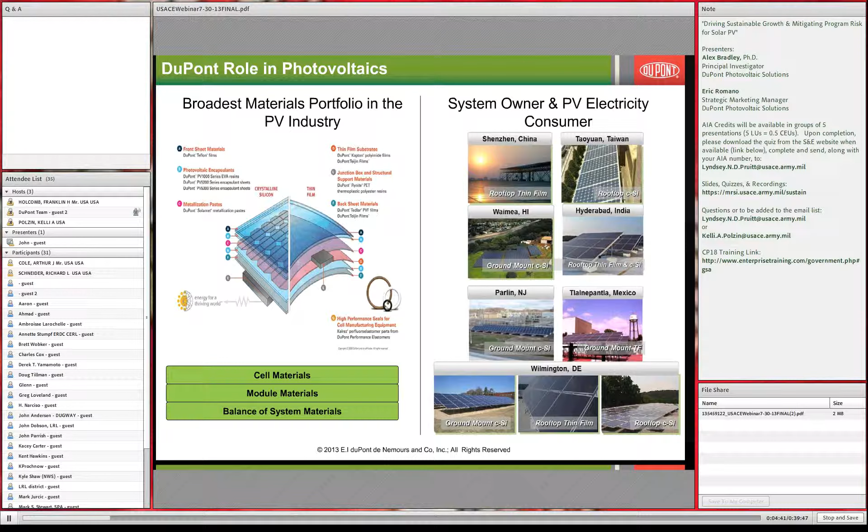On the right-hand side, when we look at some of our systems at DuPont manufacturing sites around the globe, it's important to recognize, just like I'm sure for many of your systems, there are many site-specific requirements. In some cases we use photovoltaics to maintain and achieve LEED Green building certifications. In some cases we have systems for technical analysis and training. And then other sites we use for truly distributed generation of electricity where the cost of electricity is very high, such as in Hawaii.

So this is Eric again. Let's start to look at the sort of morphology of a PV project, if you will. And first we'll look at kind of the objectives one is trying to achieve, and then we'll start looking at these over the frame of time. Achieving all the objectives of someone earning money, getting the power out of a system over a long period of time is very non-trivial. And the energy production and the financial performance when one is doing a PPA are not always aligned.

So if we look at the financial performance side first, there's a lot of developer focus on incentives, taking the cash out through our interesting tax system in the United States. The off-taker payments, there's often performance insurance that backs up a warranty, and clearly potential warranty claims if there are in fact issues. What one has to remember is one does not get the electrons back, right?

So if there are system issues, if the degradation is higher than predicted, and one wants a certain output from a system, it's challenging enough to get the financial performance one wants and actually achieve a warranty claim, for example, and we'll touch on that. But actually, you just don't get the electrons back. So folks that want to manage against a particular energy output need to be more careful in how they structure their projects and how they deal with the industry in that regard.

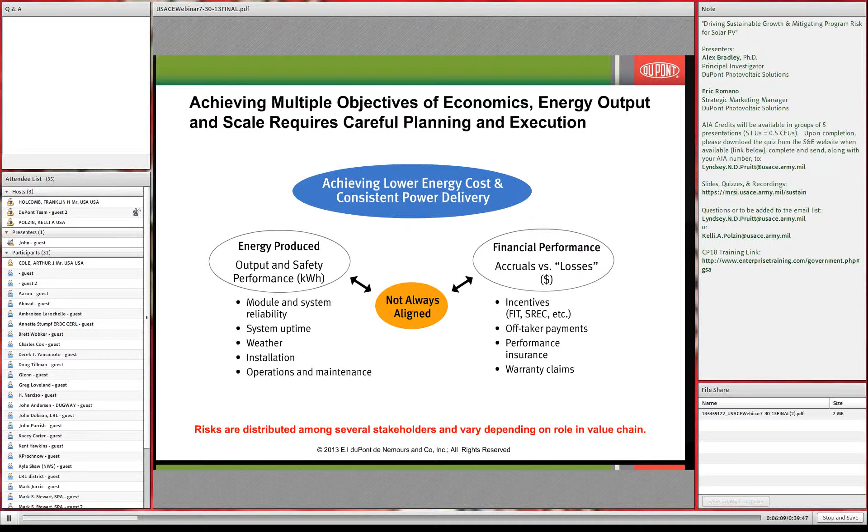Two examples we frame that people start with the same objectives and have very different outcomes. The example on the top is 24 schools in San Diego, California, with the objective of going with solar to reduce energy price and also get off the grid and have their own energy security. After 6 years, all 24 schools had the solar removed because of a defect that led to a safety issue.

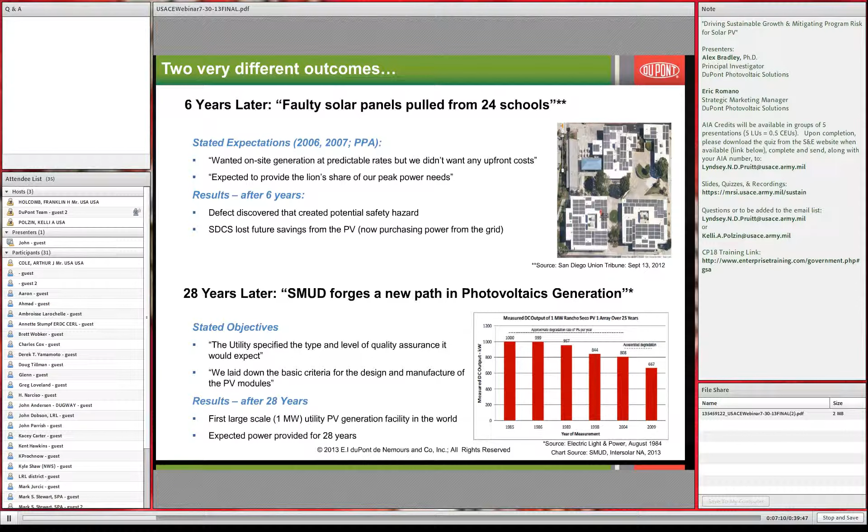The same objective was held by the Sacramento Municipal Utility District in Northern California when they stated they wanted to do the same thing, actually do maybe a little more technical experimentation. It was the first 1 megawatt site in the world. They, however, took an extra step and specified the level of quality and the technology they were going to use. Those panels worked successfully for 28 plus years. We have many of them here in Wilmington. We're collaborating with SMUD on analyzing those panels. So the objectives were the same, the behaviors were different, and the outcomes were very different.

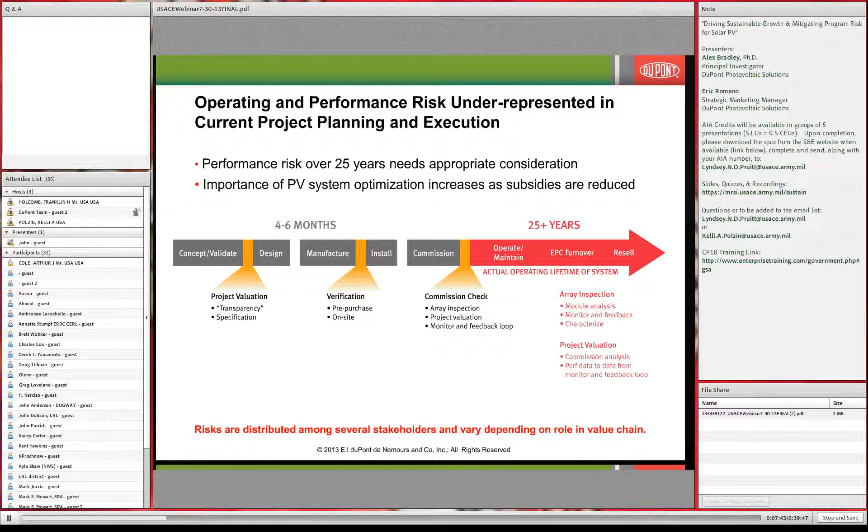If we look now across time in the PV, and we spend a lot of time up and down the value chain trying to understand this and understand performance risk, we find the industry spends a lot of its effort in the first 4 to 6 months of designing and installing the system and ensuring systems get financed. There's a lot of focus on off-taker credit and land worthiness and interconnection, all important issues. Very little focus on what's going to happen for 25 years when the system is performing.

And remember that about 70% or so of all developers are that. They're pure play developers. Projects are likely to be resold, et cetera. So thinking the developer is going to somehow manage performance risk for 25 years is a little bit of a chimera. In fact, Nellis Air Force Base project's been sold twice, and I think it's about 7 years old.

On the next slide, you can see some of the challenges and risks that solar modules will face in the service environment. There are multivariate stresses that operate on a solar module throughout its 25-year lifetime. The industry in some ways has done themselves a disservice in saying that solar has no moving parts. It has moving parts, those laminated structures, they just move very slowly over time. That's coefficient of thermal expansion. And recognizing that many of these stresses will be operating simultaneously on the module.

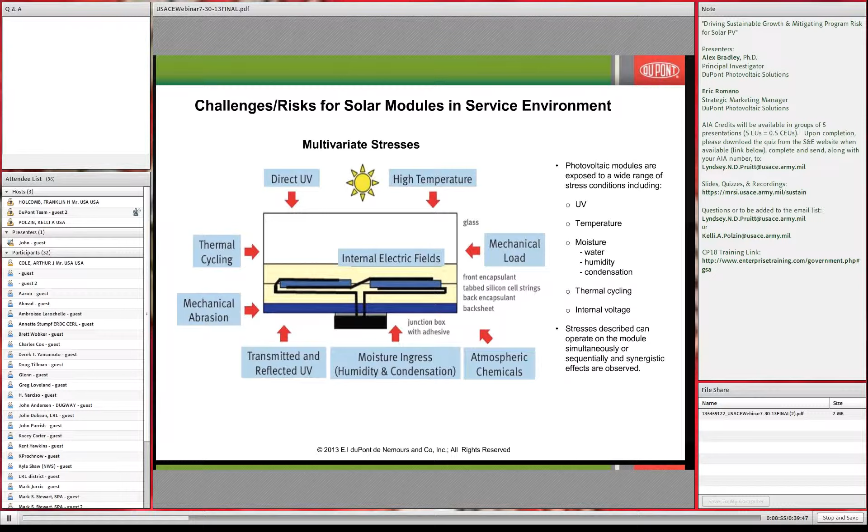In order to understand these stresses and what the challenges and risks are that impact the long-term performance of a PV system, you really have to take a step back and take a systems approach to understanding the performance of a system over its 25-year lifetime, recognizing again that there are many variables that can impact the performance. And what you see here is a fishbone diagram in which we start to call out the different variables that will impact the performance of the system over time.

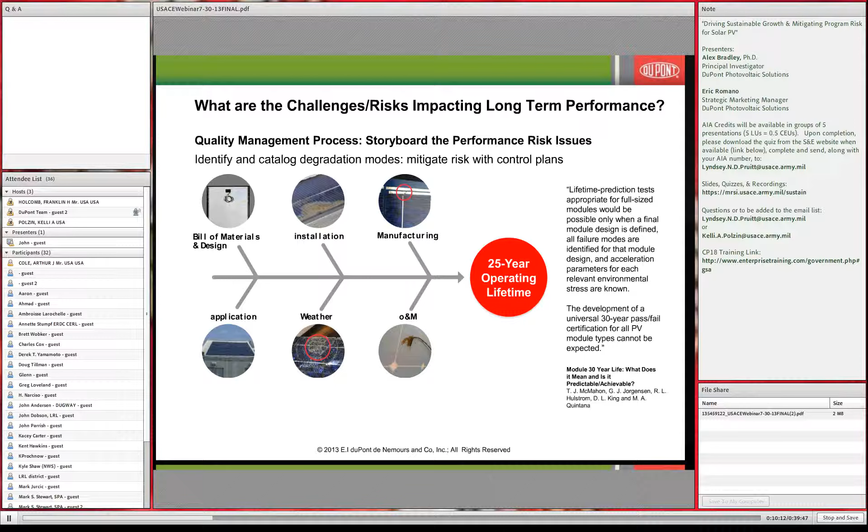And we've begun to catalog and identify these degradation modes in order to mitigate the risk with control plans or improved testing methodology. And I'll begin to go through some of these in the interest of time. We won't hit all of those. Also provided you with a reference that shows and indicates there is no one test that can predict if a module will last 25 years, at least not until we understand all of the degradation modes, all of the acceleration factors, and have a fixed design.

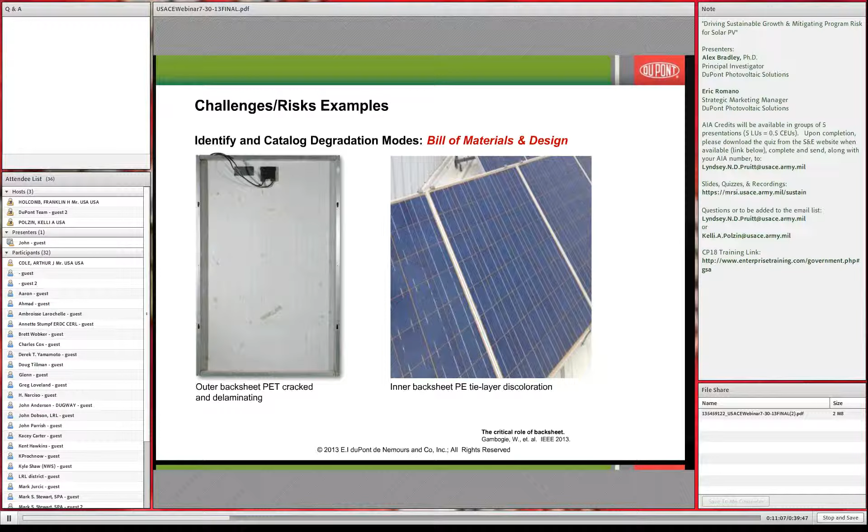In the next slide, as we begin to identify and catalog the different degradation modes that were called out in the fishbone diagram, we can see that the bill of materials and design is one area of risk that we here at DuPont have a lot of familiarity with in terms of supplying the materials to the industry. What you see here is modules that have been in the service environment for less than 5 years that have been sent to us for analysis. The module on the left-hand side has the outer weatherable surface cracked and delaminated, becoming a safety issue. On the modules on the right-hand side, the inner layer of the backsheet has begun to yellow and discolor.

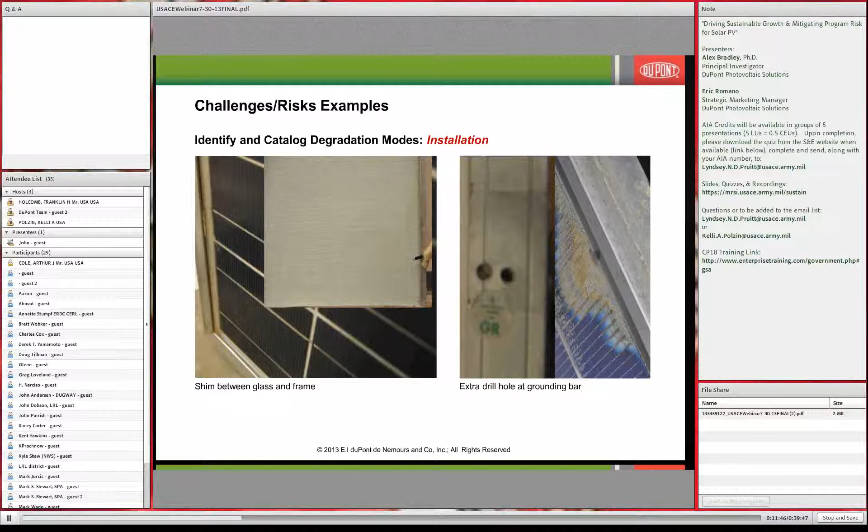The next degradation mode, when we look at installation errors, we can see the module on the left-hand side was a glass type of constructed module that had our ionomer encapsulant in it. A shim was placed between the frame and the glass, causing that glass to fracture on the back side. On the right is an example out of one of our own systems in which there was an extra hole drilled through the module at the grounding bar, which penetrated the module and began to degrade the cell.

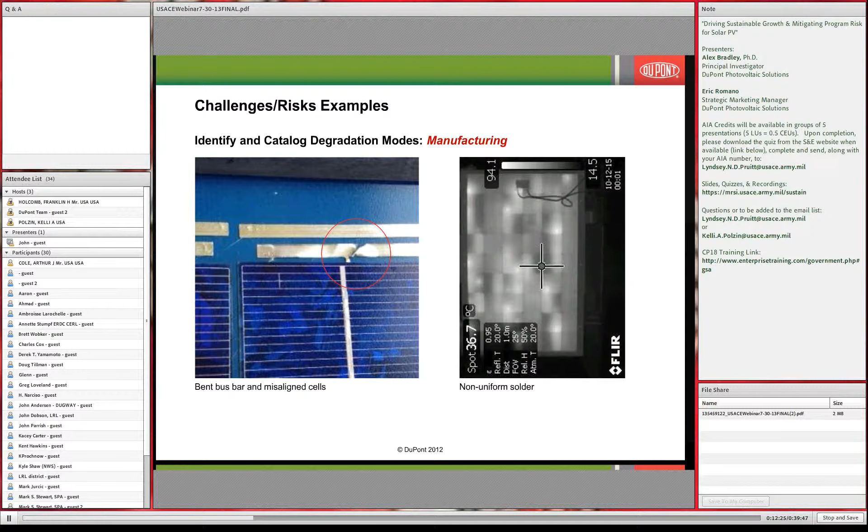Consistent manufacturing is very important as well. You can see here some examples of manufacturing issues. On the left-hand side, you see bent bus bars and misaligned cells. This is a safety issue as it can create an arc over time. On the right-hand side, you see the effects of non-uniform solder. This is a thermal image of a module showing hot spots at the solder bonds and interconnects.

So no one sets out to create PV systems and PV modules that aren't going to work, and that's particularly true of people that want to use or buy that energy. There are many assumptions that are made in the industry, or misconceptions, that lead to the results not meeting the expectations, and we'll touch on a couple of them. One of the biggest assumptions made is that a module is a module, and we'll touch on that because, as we have found in our fielded module work, that is definitely not true, and you've seen some examples.

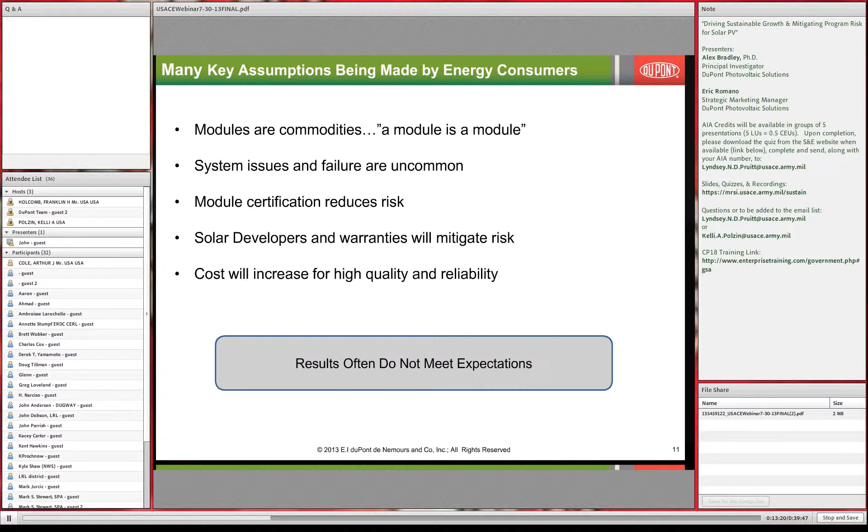There's another major assumption we'll touch on, which is that module certification reduces risk. The certification tests essentially show that when you plug the module in, it's safe. They say very little about 30+ years or 25+ years of performance, and we'll talk a little bit about that as well. We'll touch on some of these things and take questions on others potentially.

The next slide shows why module choice has really become difficult, especially here in the United States. In the lower left-hand side, what you see was the seminal work performed by the Jet Propulsion Laboratory when they were contracted by the Department of Energy to optimize the design structure of a module in order for it to last 20 to 30 years. And what you see is, as they go through the different design iterations, the bill of materials had moved to a fixed design that incorporated glass, EVA, and a Tedlar polyvinyl fluoride based backsheet.

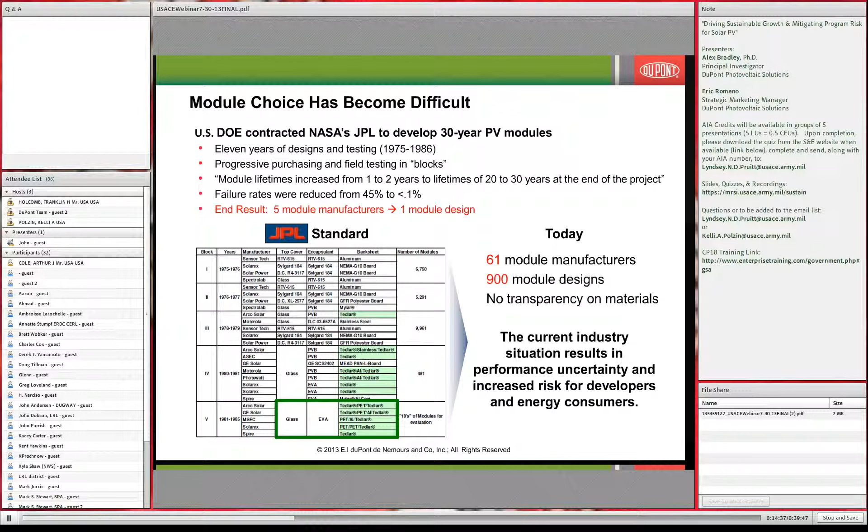Currently in the industry, when we look at this slide and compare it to today, we say that the industry is actually decommoditized in the sense that now there are over 61 different module manufacturers with 900 different module designs according to Solar Pro magazine. The current industry situation now results in performance uncertainty and increased risk for developers and energy consumers.

Some point risk at different geographies: oh, it's because modules are made in China. And that really isn't the driving issue. There are several issues driving the behavior, but it's not specific to one geography. So we've seen issues in our fielded module work with modules from Japan, with modules from the United States, and with modules from China. And these are three examples, and we'll dive into one in more detail.

One of the key issues the industry faces is, as Alex pointed out, there are no predictive tests for long-term performance. And as the module makers fight to survive in the economic situation they're in, they just don't have better tools than the certification tests when they're making material changes. And these are some of the results that those material changes have on system developers and energy consumers.

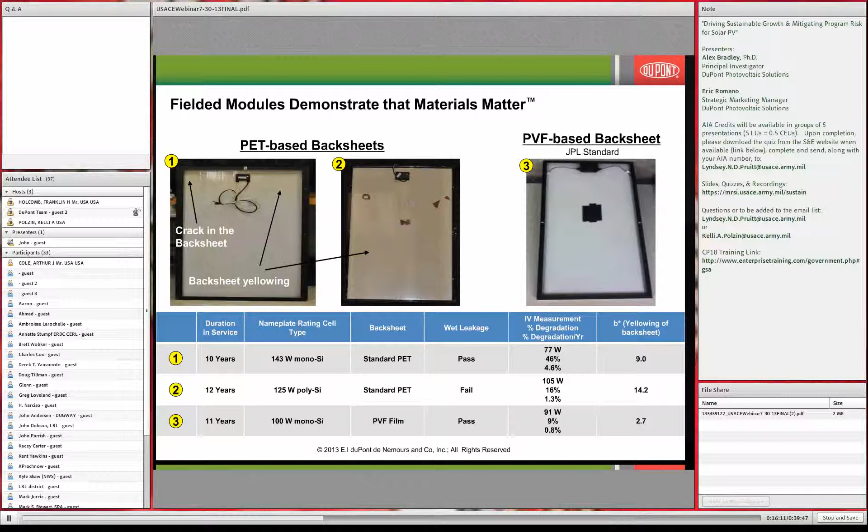This is an example from our fielded module work. One of the first sort of experiments on materials actually had to do with a backsheet change. Japan went to a 10-year feed-in tariff residential market. The Japanese module makers shifted from the JPL standard to polyester backsheets, and these are the results. We studied many modules, and here's a summary of what we found. We found some failing wet leakage, so safety issues. We also found higher levels of degradation as those materials degraded.

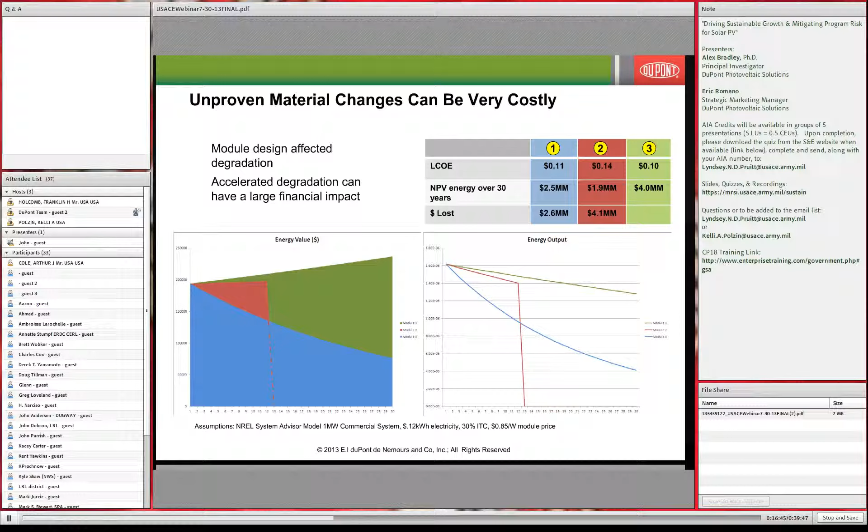Here we've plotted on the next slide the impacts of that. You see the module that was taken out of service after 12 years, energy went to zero, and the module with higher degradation, you see that curve of energy output as well as energy value. And you're talking about millions of dollars lost in that case to the developer, but electricity lost to the energy consumer. And again, these were all certified modules, and the expectation is they'd all perform at the green line. So it's all about knowing what you're getting yourself into.

See if I just skipped a slide, I'm sorry. I don't know what we just skipped over.

As Eric mentioned, it's important to know what you're buying. There's a lot of variation in the bill of materials, and that variation will result in different performance of the modules in the service environment. And this is clearly an example of two different bills of materials performing differently in the service environment.

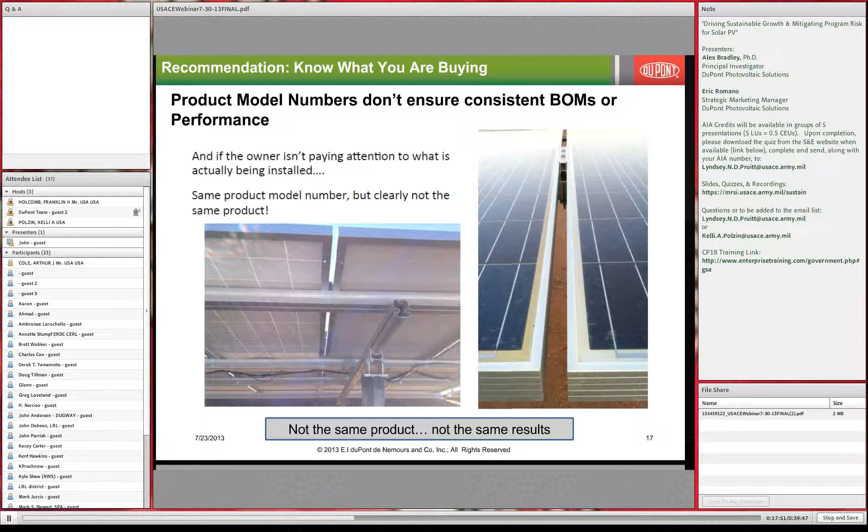On the right-hand side, you see one module that is turning yellow and the module adjacent to it not turning yellow. And it's clear also in the system on the left-hand side, two different types of weatherable materials being used in the same type of module.

The next thing we wanted to touch on is, as a potential PPA customer buying energy, it's good to know where the developers are coming from, if you will. And here's some work from a survey of over 100 developers. How do they think about reliability? And it's something the industry is trying to deal with and grapple with, granted. So two different charts that show some interesting misunderstanding of reliability and really a lack of quality management 101, if you will. Is it more important to know who you're buying from or what's in what you're buying? Over 2/3 said it's more important to know what brand or who I'm buying from.

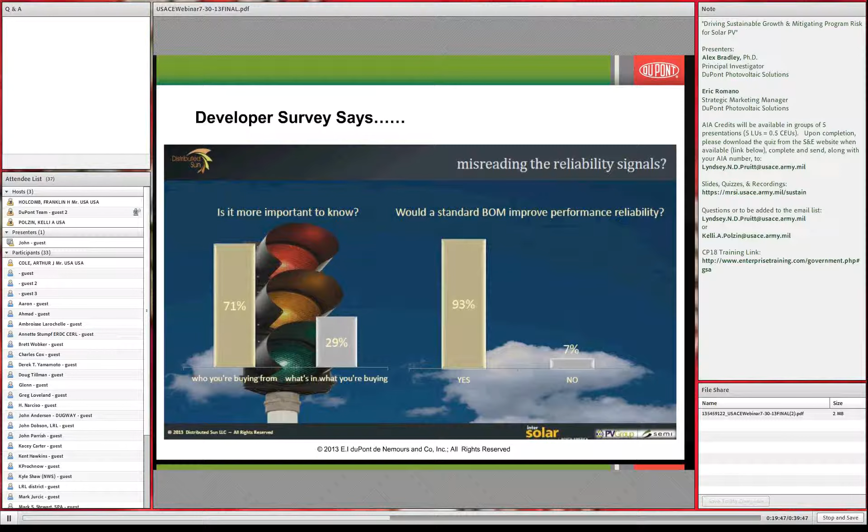Down lower in the survey, separated on purpose, would a standard BOM, bill of materials, help improve reliability? 93% said yes. So very inconsistent responses. The fact is there's no transparency now in the industry, and folks don't know what they're buying as materials change dramatically.

One way to mitigate both the design risk and the manufacturing inconsistency that we spoke of earlier, two prongs of that fishbone diagram, is to implement a control plan through fixed design and consistent manufacturing processes. We here at DuPont have been implementing that same mentality in our own systems and using our own systems to learn and provide a feedback loop for us. In addressing the design and the bill of materials, it is appropriate to have a technical specification, and regarding the manufacturing, consistent manufacturing is important to ensure a quality program such as ISO 9001.

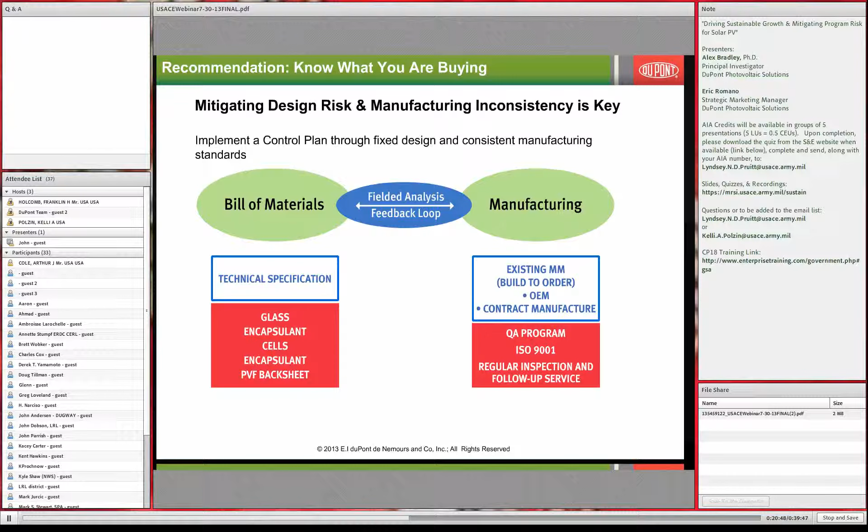So just to get more detailed on the best practices, these are examples of things that we've provided to the EITF as recommendations, some of which are being adopted, some of which we're still in discussions on, but on the left, best practices. We've talked about, again, this Quality Management 101, increasing transparency on module selection. So the solar industry is quite unique in that there really are no specifications, and there's no what we call conformity. So a module maker can have multiple bills of materials that all pass the safety test, basically, that we've shown have very different end-use outcomes.

And we believe that both the developer and the energy consumer, if they're interested in energy security, should understand what that bill of materials is and make sure that what's provided conforms to what was quoted and chosen.

Or in case of what we do and some developers are starting to do, you specify a bill of materials from proven materials and say, this is what I want to buy. We believe it's important to improve visibility of past performance of developers. The industry is developing in terms of really understanding performance and how things have worked or not worked.